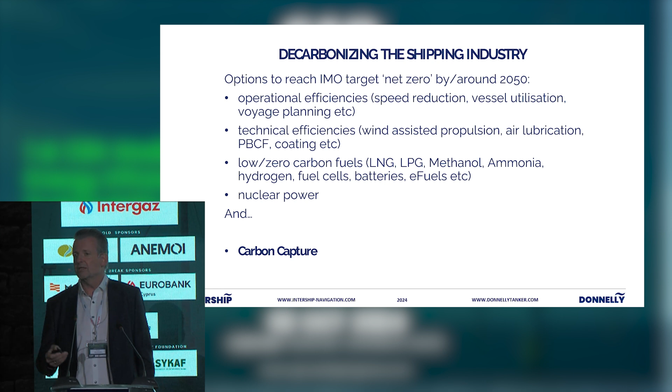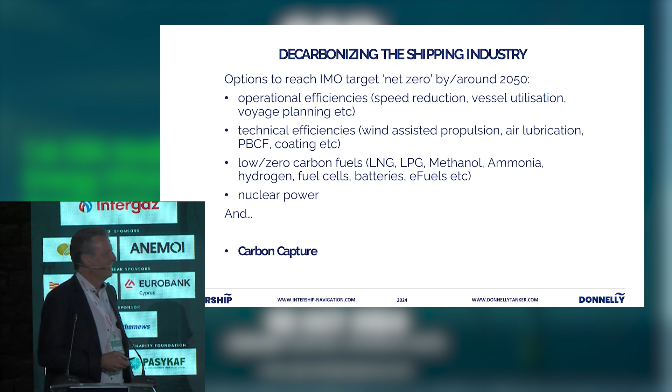By the way, I don't know if Kim is still here. The last pictures, they looked as if you only carry wind turbines and no cargo anymore. I hope that's not the case. But very interesting as well. The challenge is it's only 20, maybe 30% of saving there. So that's not going to get us to the finishing line that we all need to see by 2050.

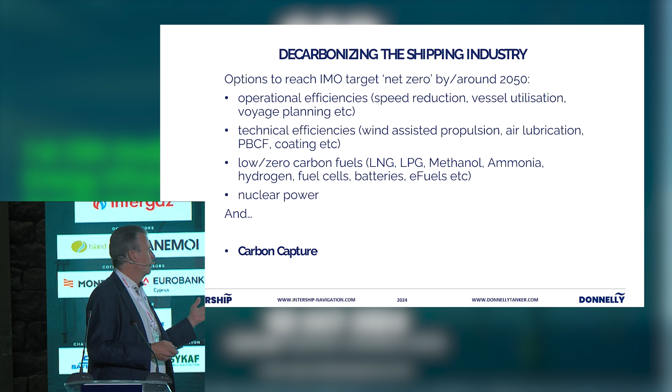We just talked about the low carbon fuels as well. There's many of them. I forgot on the list here the obvious ones, which is biofuels. And then, of course, methanol, ammonia as the most significant ones going forward. We didn't talk about nuclear fuel. It is an option. I think many of us will have our concerns with it, but there are discussions, molten salt reactors, for example, as potential - just extremely expensive at the moment.

And finally, and that's what I will talk to you about, carbon capture. We are about to start a pilot project with a company that was actually listed on the list just now, that's shown by a previous speaker, which for a specific vessel and a specific trade - and this is what I want to talk to you about.

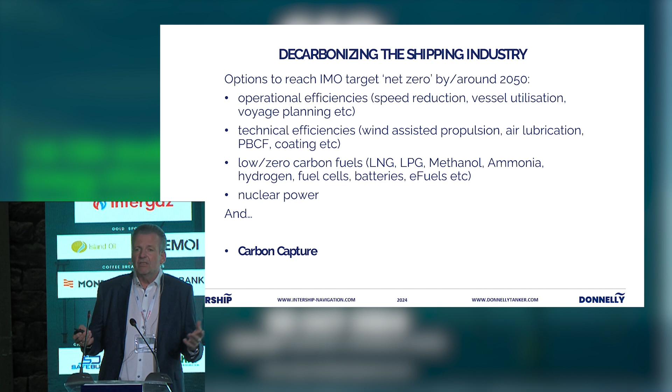The obvious benefits for carbon capture is that it will reduce the demand for low or zero carbon fuels. So when you install this, you're not competing anymore for the other fuels, methanol and so on. It also reduces or eliminates the competition for sustainable biomass. Biofuels, even though they may be very interesting because they are easy to use and most ships are ready to use them, of course they are competing for land that could be used for production of food for human consumption.

And there is a lot of land-based experience already. Carbon capture has been around for some time, both in the industry and also in the wider attempts to decrease the carbon in the air.

There are challenges, there are obvious challenges to using carbon capture systems. One of which I will talk about is weight issues. Keep in mind, every ton of fuel that you burn creates 3 tons of CO2. So you need to store that somewhere until you can offload it. And as the previous speaker said as well, there are some systems in the market, but very few have actually been tested and taken through pilot phases.

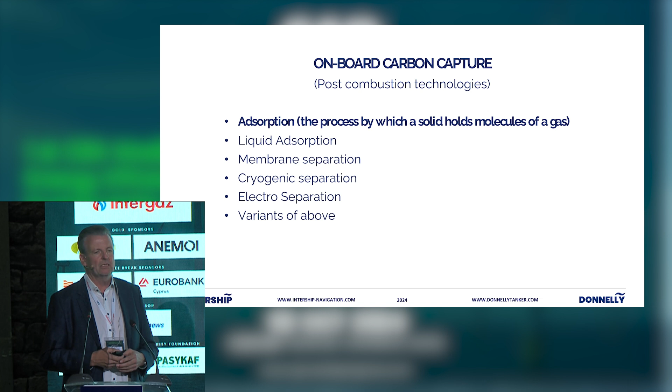I don't want to go into detail because I can't. I'm not a chemist and I couldn't even explain this to you. But the process that I will be talking to you about is what is called adsorption. It is the process where a solid, which I'll explain, will be absorbing the CO2.

As I said, this is a pilot project which we're about to start. The ingredients, the participants in this, is first and foremost the

equipment supplied by Seabound. The Seabound system works in such a way that it uses quicklime, which is calcium oxide, which by default, by design, absorbs the CO2 and turns it into limestone. So quicklime is actually a product that is not found as quicklime. It is actually limestone, which through heating is then separated into CaO and CO2.

And later, when you just have the quicklime, the quicklime gets hydrated, so then it doesn't absorb the CO2 automatically. But when it dries up, it automatically absorbs the CO2 again.

Now we'll show you how it works. We will be doing this on one of the Hartmann ships. Hartmann has a cement carrier called UBC Cork. It's a relatively small vessel, 8,000 metric tons deadweight, trading along the Norwegian coast. And I'll explain also why we chose this vessel.

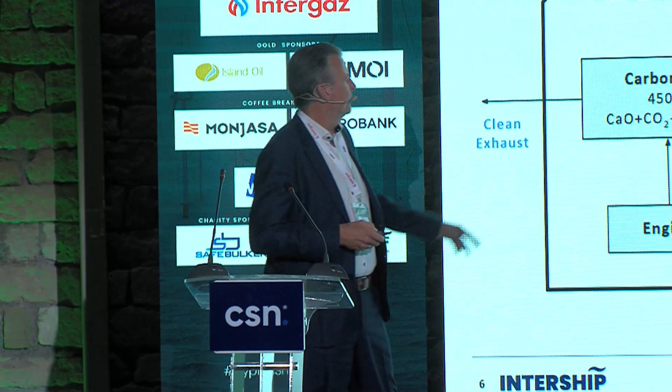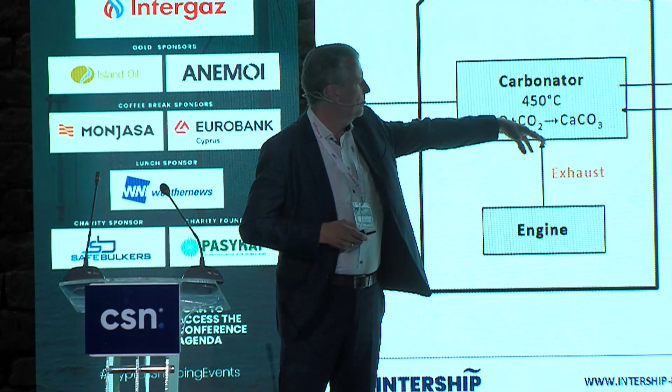So this is a schematic drawing of what's happening. Here's the engine. The exhaust passes through the carbonator, and the calcium oxide absorbs the CO2, turns it into calcium carbonate. And this is what happens on board of the ship.

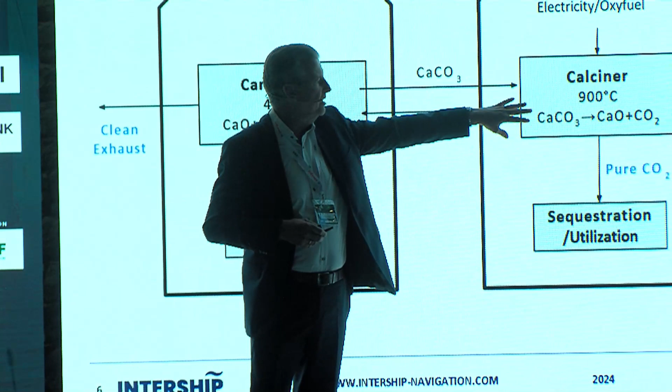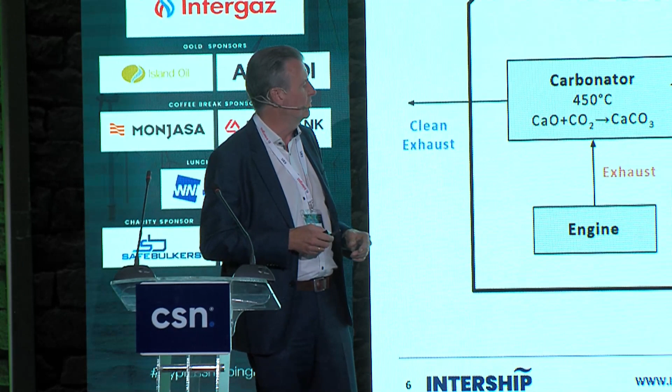Then you pass this on shore, and through this operation here, which is again heating up the calcium carbonate, it separates the calcium carbonate into calcium oxide and CO2, and you end up with pure CO2, which you can then either sequestrate and put it in the ground, or reuse it in industrial production, or alternatively use it to produce fuel again. So it becomes a circular movement.

I think the previous speaker was also talking about this already.

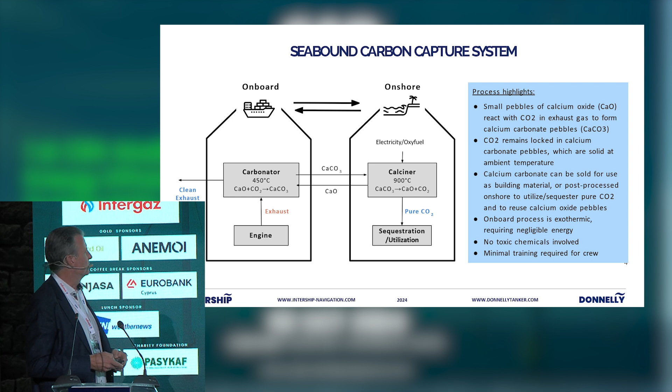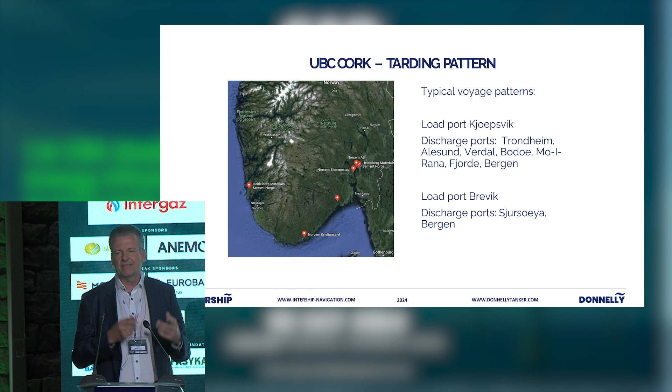As I mentioned, for every ton of fuel you burn, you have to store at least 3 tons of CO2 that you create on board of the vessel. So if you have a very substantial fuel consumption, you end up carrying only CO2 at the end.

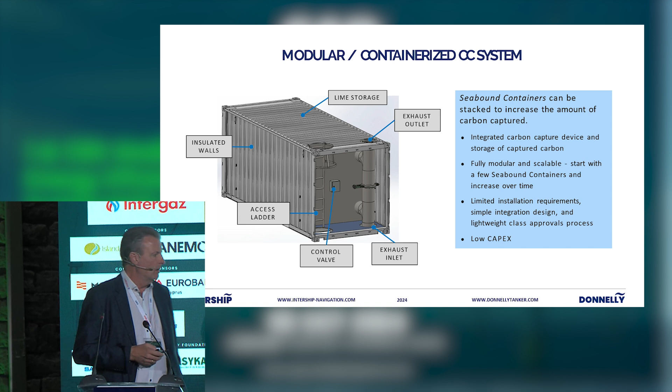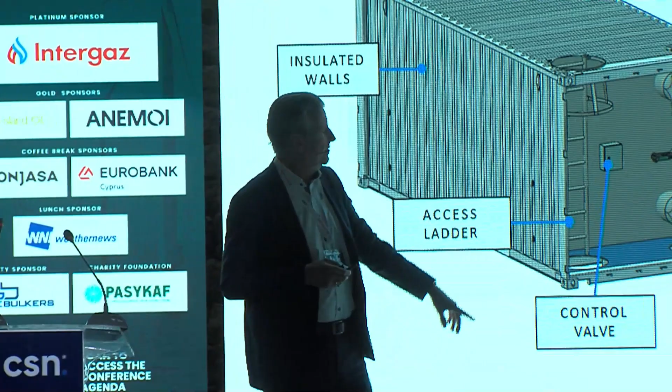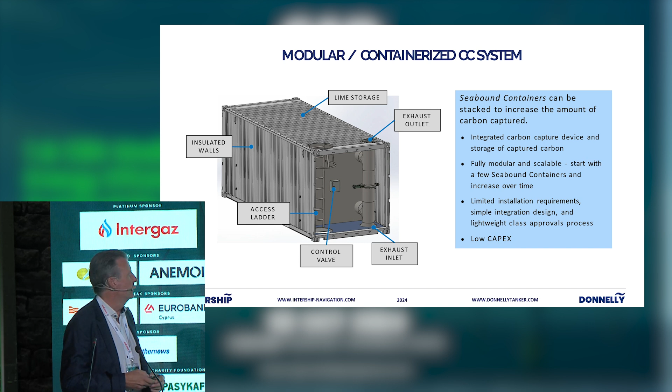The system that we will be using is a modular containerized system. Essentially, it contains 20 tons of pebbles of the quicklime, and the CO2 from the exhaust will pass through the container. It will go through the pebbles. The pebbles, at the same time that they dry up, so they dehydrate, they will absorb the CO2, and essentially the CO2 replaces roughly the water that is within the pebbles, so you are capturing the CO2 in these containers.

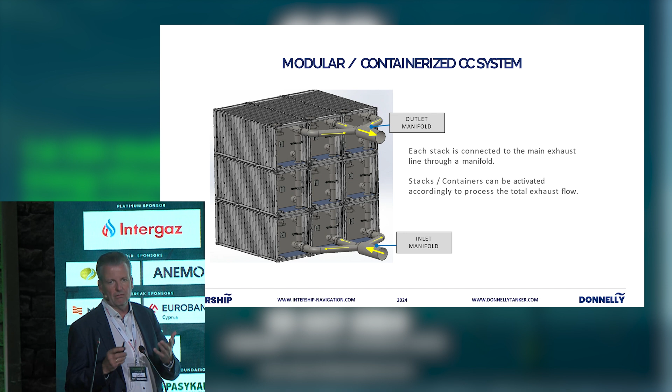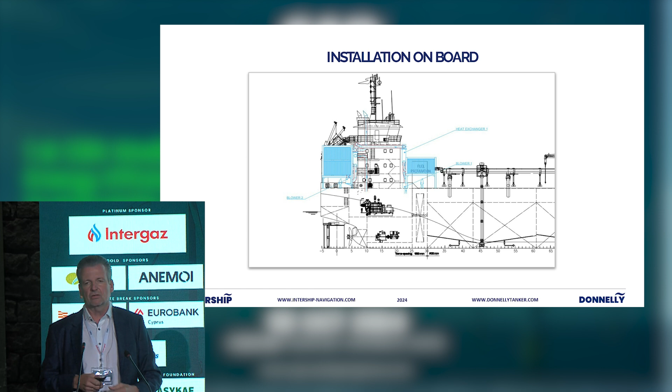The containers, this is a scalable system - they can be stacked to any heights and tiers, so you can use this on a relatively large scale. We will be starting only with 3 containers initially, and one of the reasons why we picked this vessel for this, besides the short voyages and the end user of the cement, was the fact that she actually has container storage capacity behind the superstructure. What you see here in blue, after the superstructure, is the stack of containers that we will be using. And you see it's also easy to pass the exhaust fumes from the exhaust pipe through the container.

In front of the superstructure is some supporting equipment. You need some booster pumps, booster blowers to counteract the back pressure that is created by passing the exhaust through the containers. So that's some additional equipment that is needed.

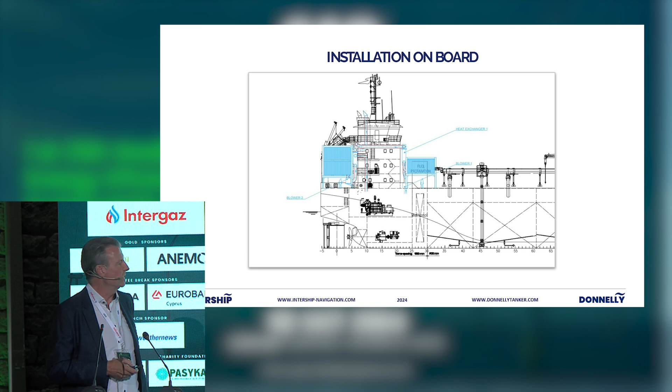Yeah, I explained the setup. So what's the business case?

Well, I said, actually the reason why I started this was, you get limestone. Limestone is used in cement production. This must be a win-win situation. So that's how we started discussing that. But of course, there's more to it.

The first, probably, it is a monetary benefit, but it is very much also a reputational benefit for the cement producers. They want to be seen to be doing something to decarbonize their own industry, which also means that they really have to look at the Scope 3 emissions, so their suppliers' emissions as well. So they are looking now at how they can bring the fleet that they are using to decarbonize within the next few years, and that's one of the means for it.

You're saving in the CO2 emissions trading schemes. You don't have to buy EUAs anymore. Norway is part of the EUA system, the ETS system.

Cost at the moment are, of course, less than $100, but people expect that when shipping is fully part of it, then it will certainly go up, maybe $150, $200. This will be roughly the cost also of the system, the operating cost of this system. Initially, it's higher.

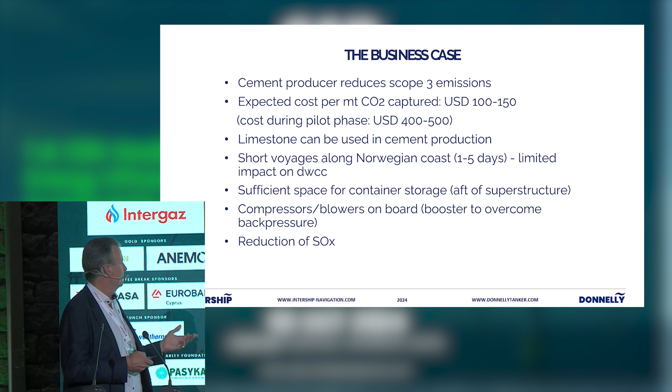I see my time is up, so I have to be a little bit faster now. Short voyages I mentioned already, by the way, this also reduces the sulfur content, so it is actually acting as a scrubber as well. I won't go through this.

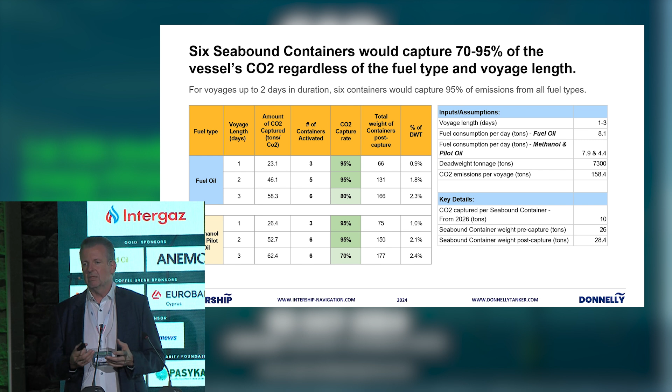I just wanted to point out here, again, one of the big challenges is the weight. You have to have, for every ton of CO2 that we capture, we need about 1.5 tons of pebbles. So the pebbles, when they absorb the CO2, they enrich. So I mentioned that they will essentially replace the water that is in there, but every container can take up to 10 tons of CO2.

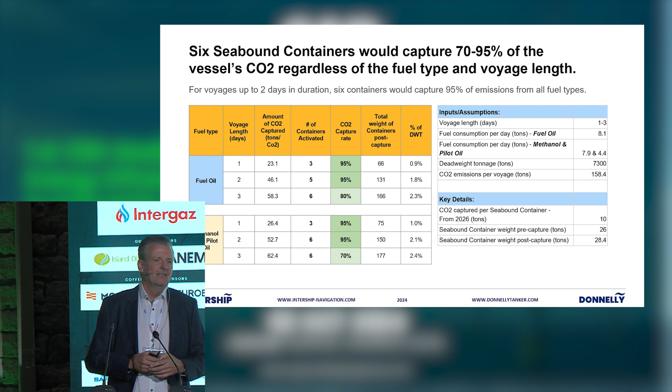The weight of a container is 28 tons. So it's 10 tons of CO2 means 3 tons of fuel. So you need a lot of containers. It makes sense when you can discharge them frequently and get new ones on board of the ship. If you have long voyages, it becomes a challenge.

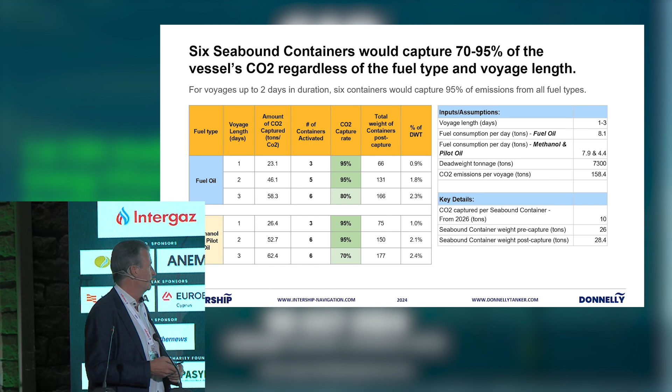Yeah, just quickly, this is the plan. What we are doing now, we will be installing the fixed piping and the fixed installations on the ship in the first quarter of next year, and then expect Q2 to start with the actual carbon capture, and Q3 next year. If you invite me again, I'll talk to you about if it worked or not. Most likely not. Well, okay, then I have to come into Athens then.

So the final one, future. I have to admit, I don't think carbon capture is the silver bullet. It's one of many potential pieces to the puzzle, one of many solutions. I'm sure that some wind is one.

The fuels, low carbon fuels are some. But there are also trials on bigger ships. There are other systems which don't require as much weight in terms of like the pebbles that we are using. But you will always have to carry the CO2 with you until you discharge it. So this is the challenge, hence that means really it is for ships that either are on short voyages or not so much relying on carrying the deadweight capacity.

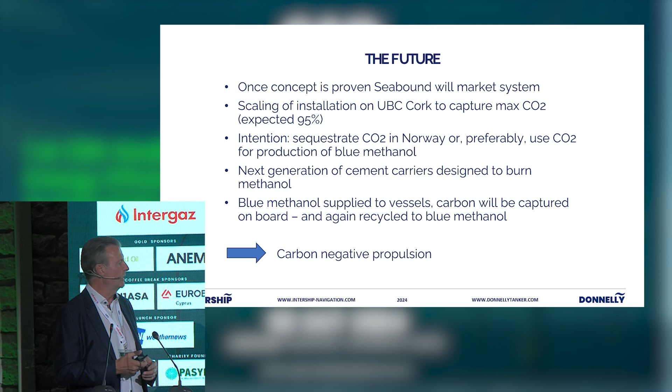Container ships, for example, where you have smaller or feeder ships, or even bigger container ships where you don't load to the full deadweight. This is a possibility for carbon capture to be used.

Finally, I was saying that when we discharge the CO2, it could be used again. And this is the end game. The idea is that the containers will be given ashore. The CO2 will be extracted again through heating, and this CO2 will then be used to produce blue methanol.

We are now working on a new building cement carrier for the same client, which will be running on methanol. And if this comes through and this works out, we will be carbon capturing. We will capture the carbon, give it ashore, produce blue methanol, put it back on the ship, use it again, capture the carbon, and so it becomes more or less a circular movement.

Sounds fantastic, or too good to be true, huh? Well, it is possible, but of course there are energy losses here, so it's not like it's the silver bullet, as I said.

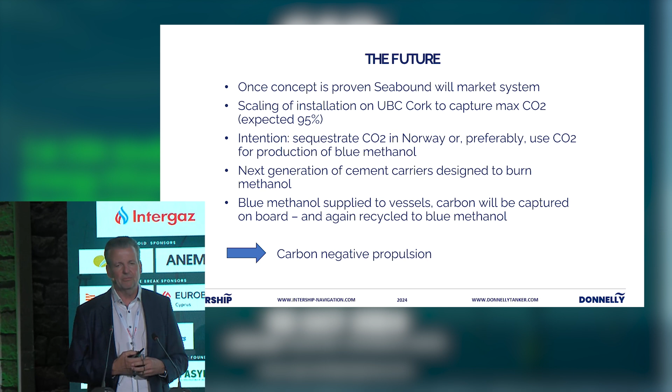But you're getting a carbon negative propulsion, and this is something that, at least for this ship and for the others that will follow in this with the same system, will help to decarbonize the industry. Thank you very much.